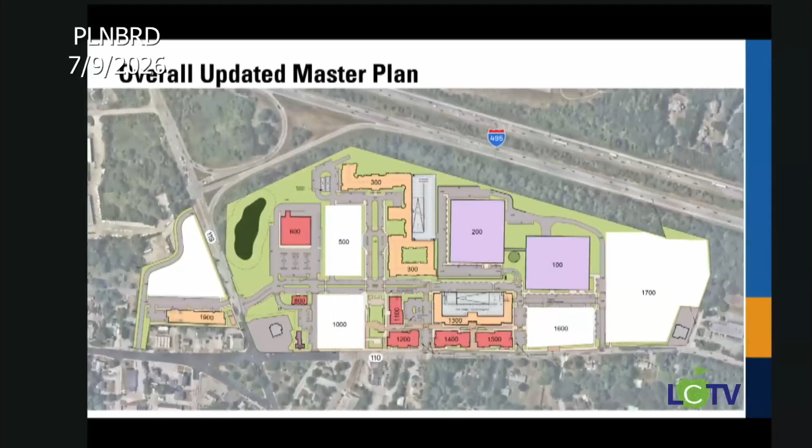Interlocked in an economic way. This anchor tenant is vital and really a cornerstone to attracting and accelerating our retail effort within the village, which has been partially approved by the board already. I can speak to that, and Mary can as well, but as we speak to tenants and capital partners, having an anchor tenant like that is critical to signing new leases and bringing more people on board. Equally important is that we wanted to be before the board as quickly as possible, especially in relation to the affordable senior housing.

If we could have waited until fall and submitted all at once, including this 1000 parcel, but all of these pieces—1000, this bank we're going to talk about, as well as this anchor tenant—all function as a catalyst for the retail, but also for generating revenue and income, showing the economic viability of this project to help justify to our financial partners the tremendous investment that we're attempting here with the nonprofit senior housing partner at 1900. So I may have mumbled through that, but really this whole section unlocks what's going on over at 410.

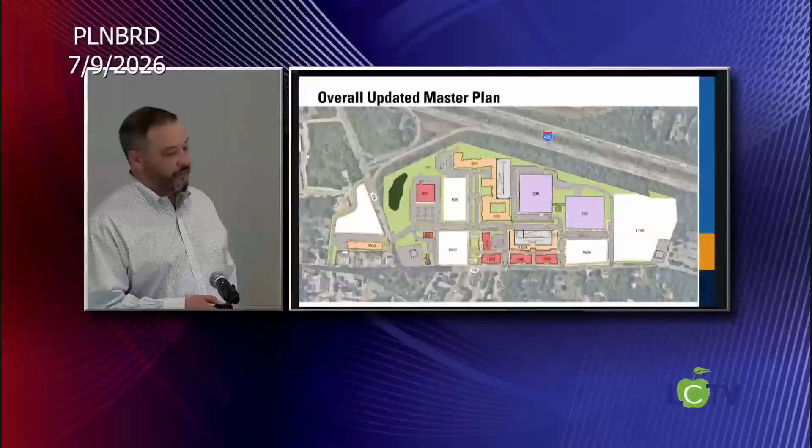I wanted a good visual, and that's why I demanded my laser pointer. Hopefully that's clear to the board, but that's something we wanted to emphasize. Happy to talk about that more.

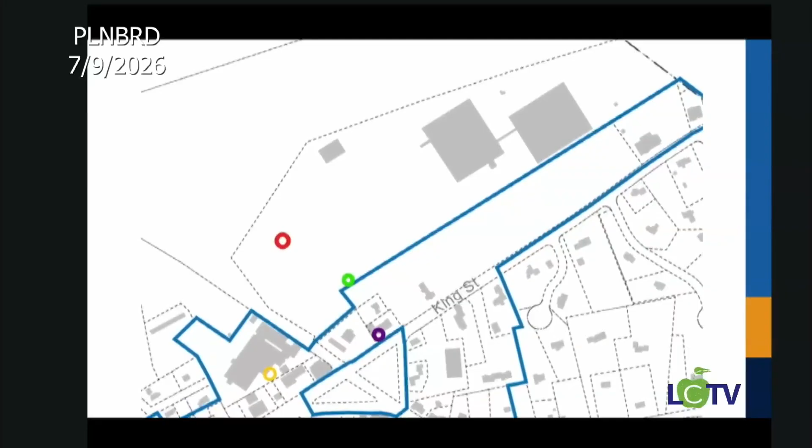This is a map you've seen before. I wanted to illustrate how we've been thinking about the elements being presented this evening. I didn't have time to label these, but this is the anchor tenant back here. There's King Street, this is the Tuttle House, this is the bank, and this is the affordable senior housing over here. This shows the location as it relates to the form-based code, within that blue outline area.

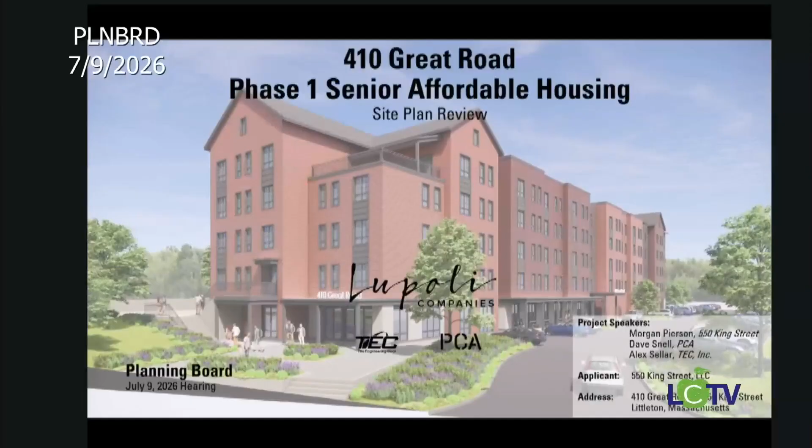So, as the agenda says, we'll start at 410 Great Road. This is something we're very excited about. We've been working on it really, really hard. It is a complicated, lengthy, and very difficult process, and we're happy we've gotten to this point, but of course there's a long way to go.

It really stems from, and it's worth mentioning this evening, dating back to the beginning of this project, before my time but not before others here, where it was clear to the community, to the board, to the select board, and to others within Littleton, the importance of bringing senior housing to this town—not only senior housing, but affordable senior housing. As I've been more involved recently, it's become clear in interactions with the board and the community that there was a strong desire to fast track, or front load, or bring on the affordable housing sooner than outlined in the town's bylaws.

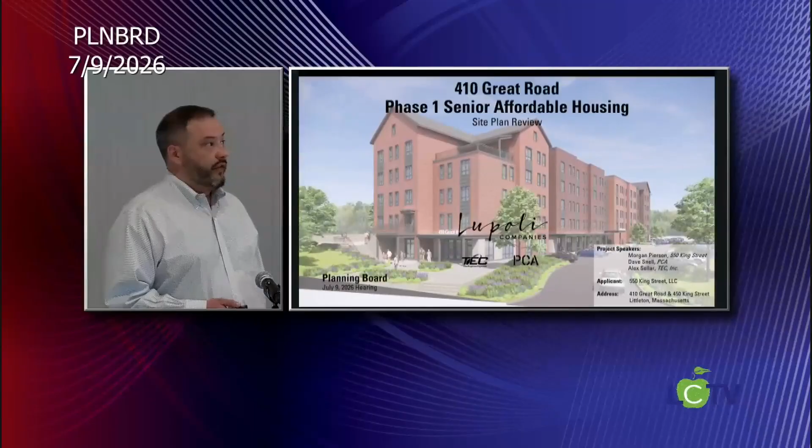I think we've made a very good faith effort to be responsive to that request from this board and this community. Even having received a letter from the zoning enforcement officer saying we are within our rights to follow the path within the bylaws, we've pivoted pretty strongly and put a lot of resources within our network and at the state level to find a really, really strong affordable senior housing partner.

Some of you have spoken to them. That's a really exciting partnership, I think, not only for the Holy Family, but for the town as well. We've heard that from this board, and we appreciate that feedback, because we're excited as well.

I'd like to also just provide a refresher. This was, and I won't go into the history of us acquiring the site, although I'm happy to if anyone needs a reminder, but really this was approved back in 2022 for 285 units.

At the time, that was achieved through a six-story building with a 4-story element along Great Road, shown here from the approval. It has the 10% affordable and the required parking spaces. Just a reminder, it was there.

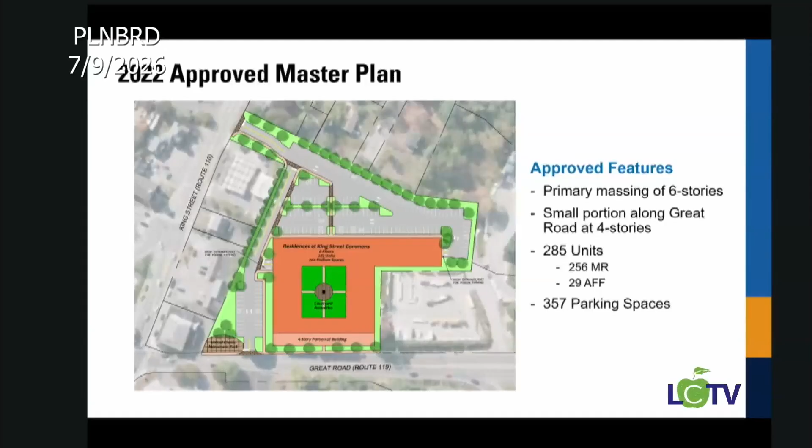I would also point out that we've been faithful to locating some open space, and we'll speak on this later, in honoring the United Elastics company that was at the mill many years ago. Here's the updated master plan, illustrating what we're talking about.

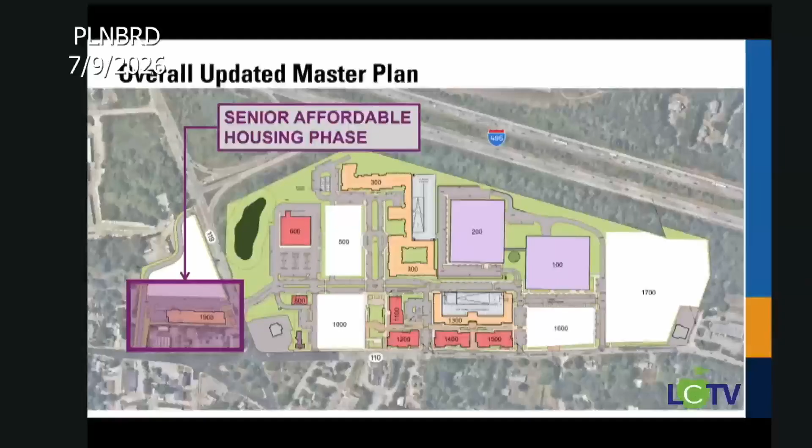Under the heading of a lot of work to get to where we are, we've bifurcated the site, and we've introduced this new concept here where we can fast track the affordable component, a big portion of the affordable component of the project.

So I'll have Dave come up. His team has been working side by side with our affordable senior housing partner to design this building.

Good evening, ladies and gentlemen, board. It's nice to be back with you. I had a nice little break from some of these, but good to be back in Littleton for this.

We're, as Morgan mentioned, really excited about this building and really finding a way to bring this critical use to the project.

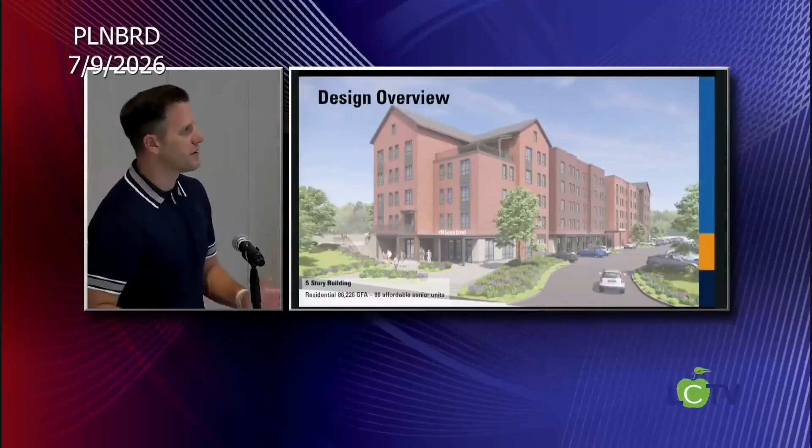So to give you a little bit of context for this building, Morgan mentioned bifurcating the site, and that preserves the ability to bring more housing in the future.

And we have, and I think you all know, as you drive up Great Road, there's a ton of grade change on this site. It's an extremely complex site. And so the way in which we've situated this building works within that grade.

It expresses itself along the ground here in the foreground, and the grade continues to raise up, and it kind of buries itself into the hill for the first story.

But maybe more broadly speaking, just about the building as a whole, we have a 5-story building. Portion of it here in the corner is 4 stories. And we have worked within the spirit of the form-based code here in many different facets of the design.

I think what you see here in the facades, a lot of movement in and out. You see different roof lines. You see a materials palette and design elements that are all born of New England traditional architectural design language.

Not only are they pulling from those references and many of the forms we see in the form-based code, but they're also pulling from the history of this site.

Old photos that we've seen of the building, the palette, the reddish hues that we're using here is pulling from the brick on the historic building, the charcoal colors pull from some old photographs we saw of it in earlier years. The divided light windows that we've brought in are referencing the windows up in the peaks of the roof. So we tried to pay homage to the history of this site by being inspired by it, and bring some of that character through.

So the ground floor of this building, and I'll probably pop back to the rendering in a moment, but the ground floor is the large communal gathering spaces for the residents of this building. So 86 units in here, and when we do projects like this, how you create this area of community is really critical. This kind of space has multifunction rooms, it has fitness uses, it has a hair salon, it has a small residence market, it has offices. A lot of these things are tried and true to creating residence communities and building relationships among the people who live here.

So the entire first floor is dedicated to that, and it has a small amount back here of covered parking as we kind of extend the building out. That's where our accessible spaces are, so our residents are protected getting out of those spaces, and they have plenty of room to move in and out through a secondary lobby here. The primary vestibule entry is here at the center.

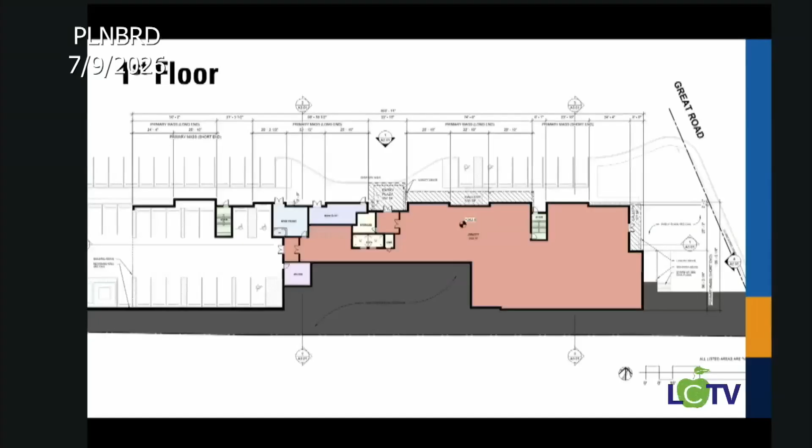At the second floor, we've included - and this is a typical residential floor - however, at the second floor, we've integrated exits on either end to allow for a walking loop. This is something that we try and do in a lot of our senior projects. The folks who live in these buildings love to walk with one another and to have a nice way to do that inside, do that outside, connecting through. So we've integrated that here, and that can provide connectivity off the site as well. Taking advantage of that grade change that I mentioned before, this is a really nice amenity for the residents.

Other thing to note, we have laundry on every floor. Those laundry rooms become, again, other points of gathering and socialization. And we've centralized the core here, which minimizes the walking distance required for all of the residents. So these are subtle design moves, but they're important to consider in making this a building that's extremely functional and welcoming for the seniors who will inhabit it.

And when you come back to how the building sits on the site, we feel like we are shorter than the approved height - we are one story less than what Morgan mentioned. We still integrate a step down, and by really pulling in some of these setbacks and the movement along the facade, the subtle changes in the materials, we think we're bringing forth a lot of the spirit of the form-based code. How it would relate to a building of this scale on this site, and how this park fronts on the street, we think is a really nice thing. As you're coming up the street, it's going to be really welcoming.

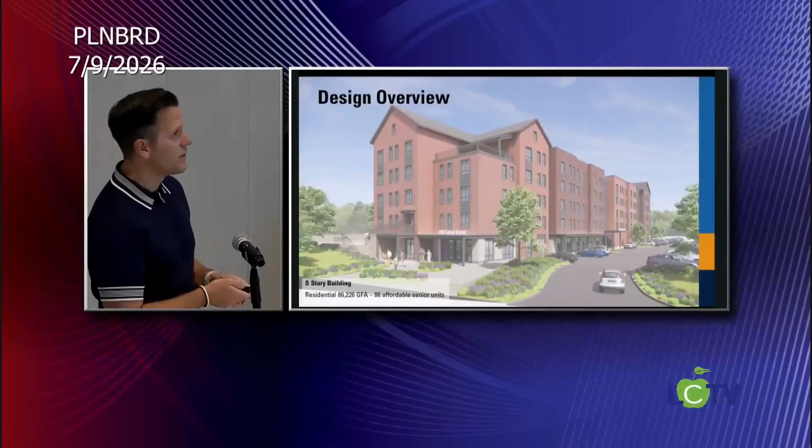And that's at the top right of the screen here of the building. Just to highlight a couple other features of the parking area, we try to keep it relatively simple and efficient layout for this use, and we have a loading pull off in the front entry area, so you can see about in the center of that main drive aisle. Use the laser, right? Fire the laser.

And so here's the pull off right here, and then along - so we have also two access points, one along Great Road, about across the street from the entry at 550, at the 550 King Street development, and then again accessing King Street at the bottom left of the screen here. So we try to maximize perpendicular parking and wide drive aisles, and even have, as Dave mentioned previously, this area that houses about 14, 15 covered spots, including some additional accessible parking.

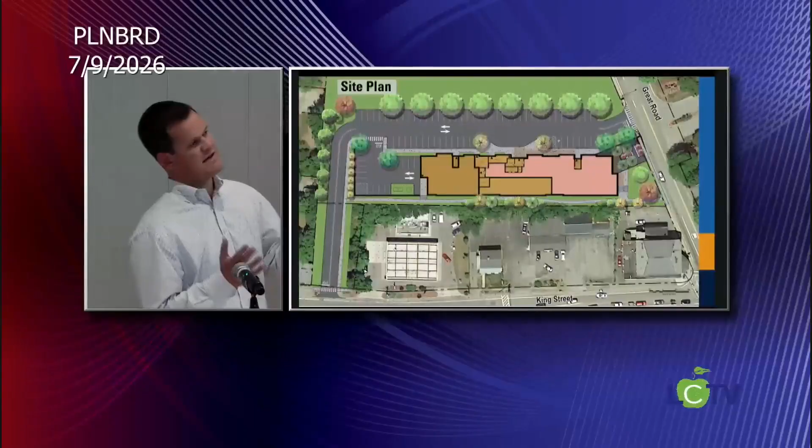Also a fun feature of this park is that it's angled and sized to the degree of that building at that location, so that shape is actually sized to that building - it's like a shadow of the old building being replicated on the ground. We thought that was a fun and creative way to pay homage to the historical use here.

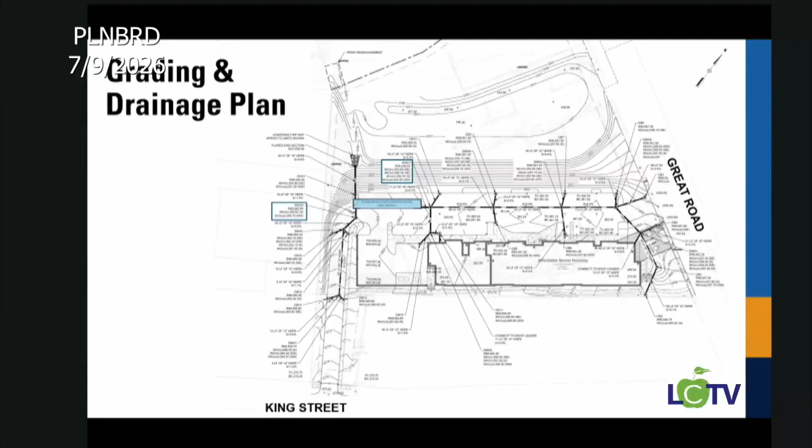This is another site view. You can see in blue, I know it's kind of technical, sorry, but I wanted to highlight that we are in the Aquifer Protection District. We are upgrading this site to current stormwater code as required, but it shows the emphasis of the infrastructure we're installing and investing in to get our groundwater recharge, which is incredibly important in this district.

Skip one here. Again, another technical plan, but we tried to put some color to this. Here's the utility connections that we intend for the site.

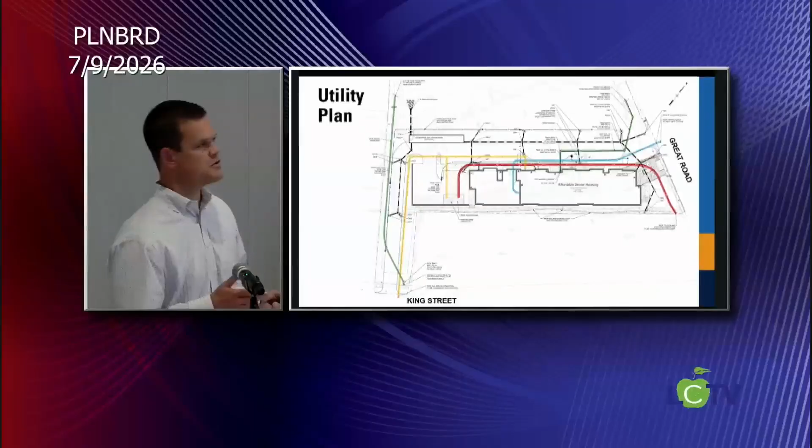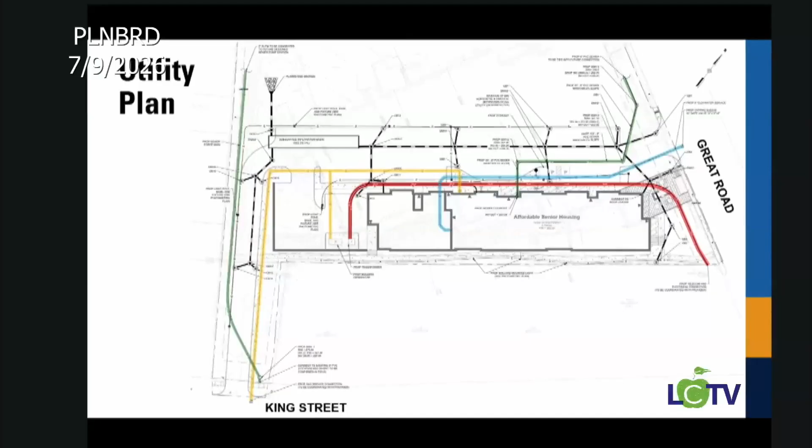A little challenging to see on this projector, but the intent here for sewer is to come out of the center point of the building and go down Great Road, headed to 495 at the top of the screen, and connect to a municipal or private line. We're still working with LELWD on a municipal pump station that could potentially be at that location, and then come up on the left-hand side to connect there to a force main connection to the main along King Street. And also on King Street, we'll be pulling gas and getting water and electric through Great Road.

At that point, I'll hand it back to Morgan to field some questions. Yeah, we're excited to hear from the board. Happy to hear from the board.

Before we open it up to the community as well, I wanted to express some sincere gratitude to people who have helped us get to this point, because this has happened relatively quickly, despite months and months of effort. Marion here is from the Affordable Housing Trust. She and Margaret were able to join us on a tour of one of the facilities of this affordable senior housing partner we're working with, and I can't overstate how meaningful it was for them to have members and leaders of the community drive to Brookline to tour their property, understand what their organization was about, ask really intelligent questions, and continue to engage with this group.

We are moving very quickly for them, but only because of the response from this board and from this community, and I think we'll continue to be blown away by how quickly we've gotten to this point. A lot of credit goes to some of the people I just mentioned, so I think it's important to say that.

The other thing I meant to mention is, as we look at this project, not only in the context of Littleton, which I think is very large and meaningful in terms of creating and delivering ground-up affordable senior housing, but even for the state of Massachusetts, this will be one of the largest standalone projects of its kind, especially regarding the deeply affordable element. I'm not patting myself or our team on the back, but this partnership is sort of a three-legged stool - this board and the community, the Lipoli family, and our affordable housing partner. It's really something, and I don't want to jinx us because we have a long way to go, but I think it's worth taking a moment to appreciate that. So with that, we'd love to hear from the board and anyone else who'd like to speak on this.

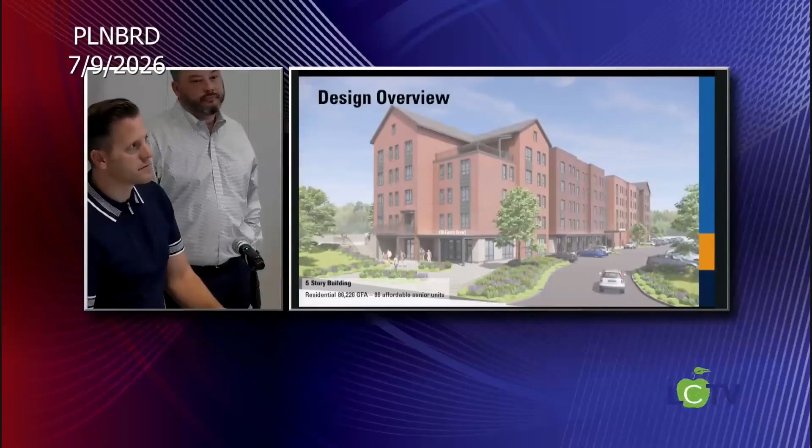I'm curious, and this is kind of like what Bartlett said, wanting to see the Great Road elevation and the King Street elevation to see what those gables look like. What's happening in that middle section? Is that a flat roof there?

Yeah, in order to make this work, there's a lot of equipment that ends up on the roof, so we needed some components of flat roof. We played with whether or not we wanted any peaked roofs in the middle, but then they'd all have to be really fake, so that we had enough room to put the equipment behind them.

Honestly, the elevation of the building started to feel a little busier. So we capped the two ends with gables as the approach, and kept it a little simpler in the middle with the flat roofs and variety of heights. So even at the entry, the parapet height drops down, and again, those masses.

This is just worth noting, but there are reveals here, here and here, where the roof line actually drops too. So you'll see this is a lower roof elevation here than this portion. We're putting in variety, and I think what you'll see is they'll read as much as actual forms instead of just popping in and out. They're also going up and down.

That's great. One question, I pulled up my notes from last time. You had said that parking had expanded from 46 to 102 spaces, and there were 84 units. Now there's 86 units. So has parking increased as well, or?

While we're on that subject, because it was one of my questions, what does HSL say about parking count? What are they finding? They have said 0.75 really is where they aim, maybe a little higher for staff, but really, we are overparked for their use already without getting to 1.25. In fairness, we're in a more suburban location, so.

I think it has more to do with how many of them just drive, period. Yeah, it's the residents, that's and where.

And relating to that, the handicap space number seems low for an elderly unit then? It's what we typically do with them, following Massachusetts requirements. I know it's Massachusetts requirements, but that's just a comment, and I think you'll see a lot more, again, when you get to this, is why we have a very big drop-off area in the front, because I do think a lot of their residents use transportation services like that. I was surprised at how few handicap spots were at many of the facilities I visited when I was looking at facilities. I have no experience with that.

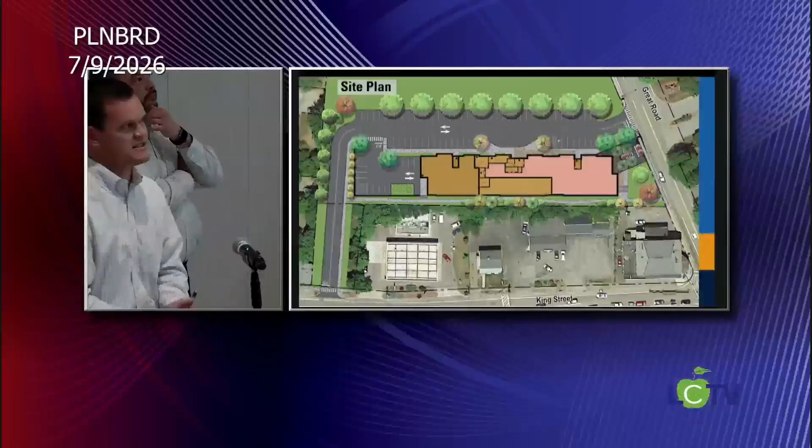So, are you done? While you have this one up, the other site plan you have shows the white part there, the road going from 495 all the way down through there. Is that not going to be discontinued?

Probably, Daryl, you always catch me when we try to catch up with master plans. Yeah, sorry. Are you talking about this right here? Yep, that is a current placeholder.

It does make sense because there's an entry here, and we have also talked about a pump station and maybe potentially an easement to connect to the sewer up at King Street. So the concern I have is that, particularly that one there, if it stays, some people might try to use it as a shortcut to avoid the light up at King Street.

And then the same thing would apply even on your smaller one there, you have a cut through that you might want to address so it's not amenable to being used as a cut through. You're talking about like right here? Yep, or the one all the way from the top. So I think you should pay some attention to driving habits, people trying to use that as a cut through.

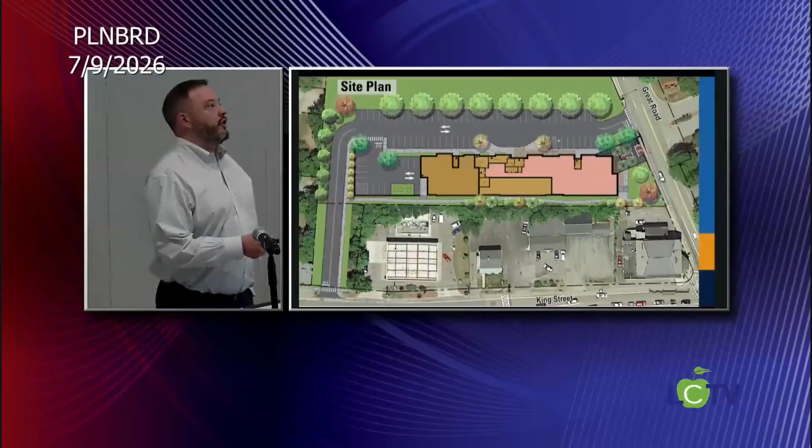But just to finish that, right there, that prevents the cut through. That's a pretty silly cut through to come through here, then you're out in the intersection again anyway. No, if you come off of 495 - I'm saying you're coming here. Yeah, and you cut through like that. Fine, that's it, and then you avoid the light at the top of the hill. I would do that.

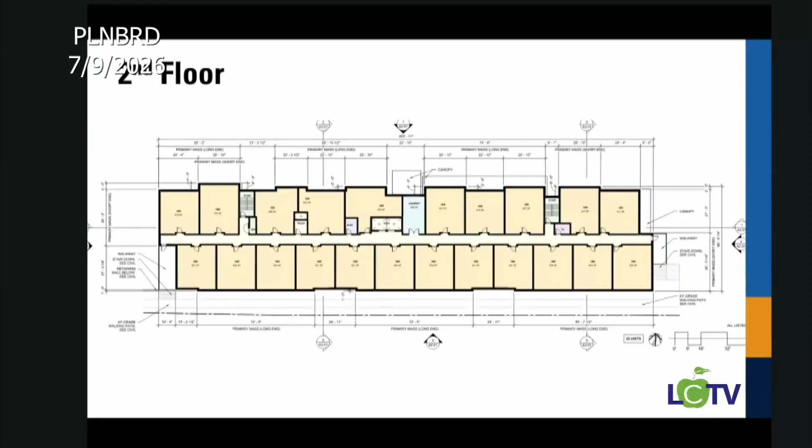We're gonna have gutters. But I mean, I have two valleys that come together. In snow and rain, that's gonna just dump right onto your porch there. I can tell you from retail phase one that we've been progressing, getting more detailed into how the gutters and downspouts and whether we have snow guards, so that's a higher level of detail, but we are considering it. Yeah, I just don't think your downspouts are gonna cover it. Anyway, that's what you gotta worry about, but you might wanna really look at that.

And I presume these will be like split systems, or is this? We might actually get a central system. We're investigating all of that. Well, if it's a central system, they can be really large.

Yeah, and to your point, the sight lines we're talking about and the height of those parapets, I think that's gonna screen it. To Bartlett's point, I agree. I'd like to see what it looks like from King Street. The extent of it, I just wanna see what you're thinking about. And when we say from King Street, we're gonna be seeing it behind the existing buildings on King Street. Yeah, we didn't do that because then we'd have to model all those, but we can. Just saying, we'd like to, I think it's worth it.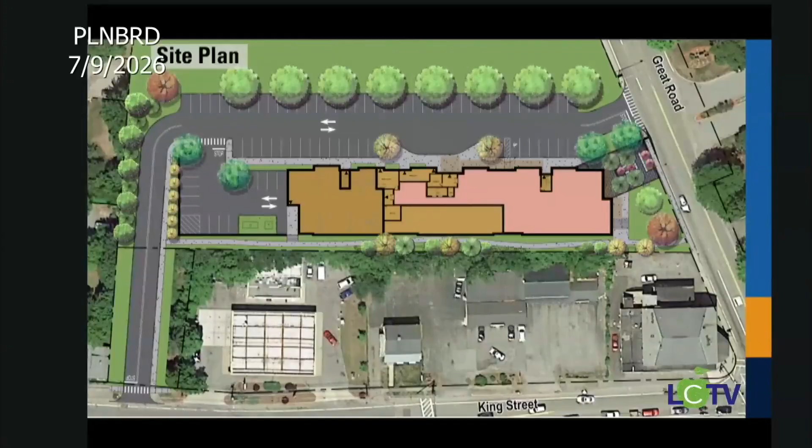And then I just had a question for Morgan. What's the sewer situation? We have been in active conversations with LELWD, with Nick Lawler, and we've all acknowledged that we need to make a formal request to transfer capacity over for this phase from 550. That involves likely a pump station here that could be covered through some of our MassWorks grants that we've been working on. We actually had it in a previous submission, but have pushed that to later this year, next year. And then hooking in on King Street right here.

Okay. So next, who here would like to have comments? Mark.

Mark Grambacher, 205 Hartwell. First, thank you for bringing the affordable housing. I think this is all great. Most of my comments are a little minor. Some of them are a little more.

I'm a little concerned about the entrance there being right across basically from your 550 entrance. You're going to have people that make a right turn and try an immediate left out of those two, that's going to be confusing. I don't know how these entrances jive with what the state report said, where they wanted you to come out basically at the 495 light.

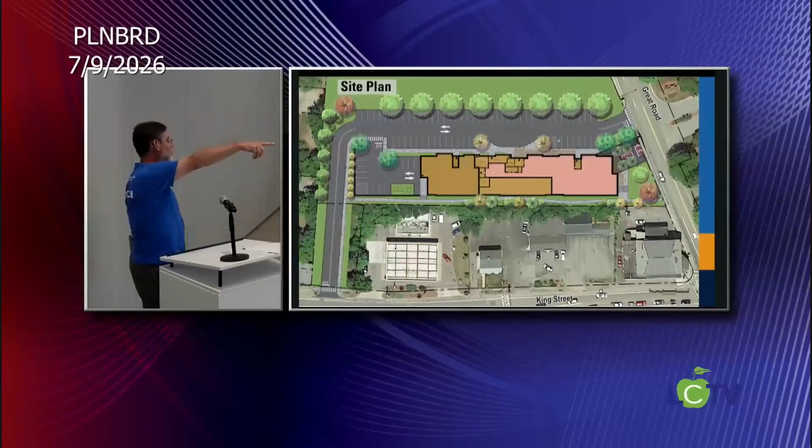That's one comment. Another is your path there for walking doesn't have - you have steps down to get down right by this, right at the end of the building. You need an ADA way to get down. I don't know if that sidewalk is an ADA grade, so you might have to check that.

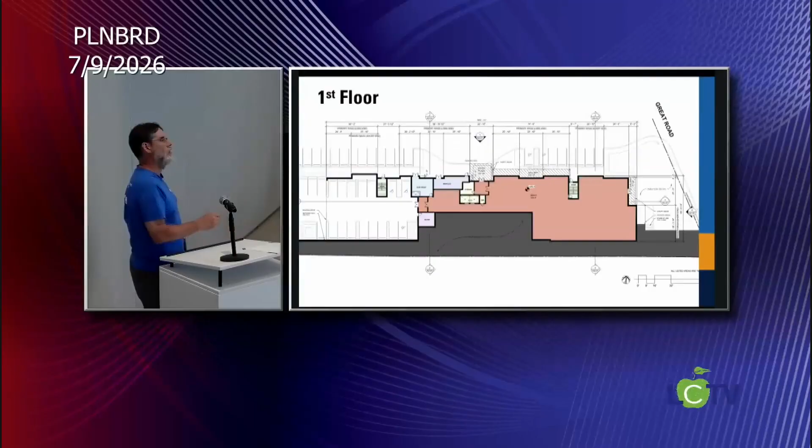If you go back to the building, your porch patio, whatever you want to call it, there on the 4th floor - I question whether you might want that on the back of the building rather than the front, because that's right over 495. I don't know how loud that will be up there versus if you made it on the other side.

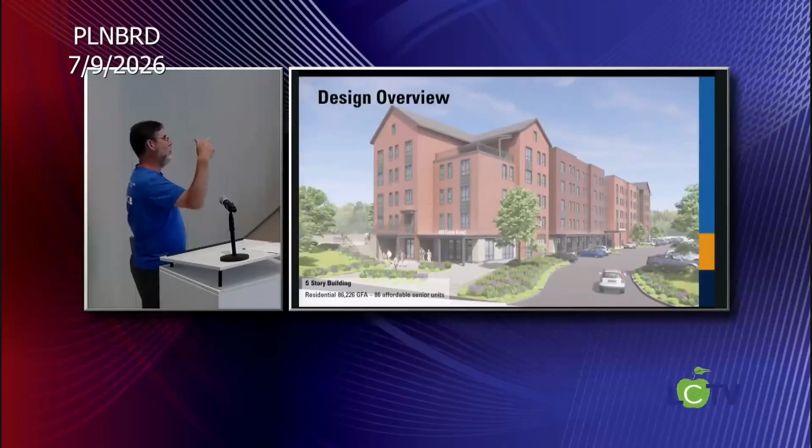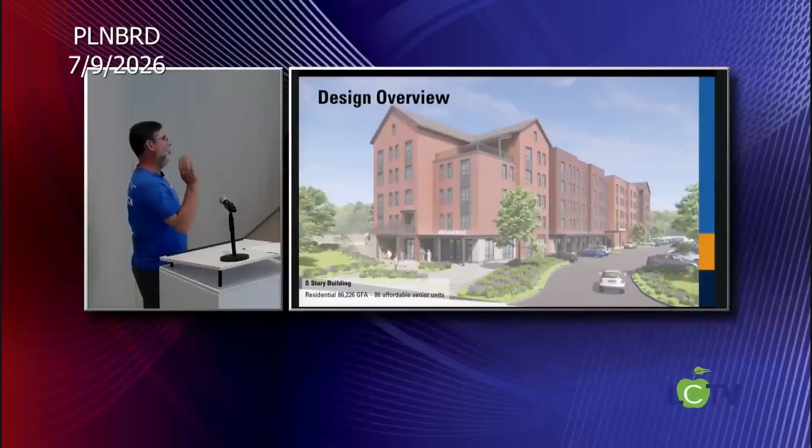It would also be helpful - the way you show this now behind the building, it looks wide open, like you can see for miles, but you can't. There's buildings right there. So it's kind of deceiving in this view. You're going to be really close packed. So just a view that shows where those buildings are on one of your renderings - I know you don't want to render it in detail, but relative heights and relative views would be helpful.

But my main, bigger concern is those two driveways are really close. You're going to have problems for entrance and exit.

George. George, you should take Morgan's seat at the next meeting so that we can compress the time.

George Sanders, 672 Great Road. I'm going to take a little bit of a different approach here. I talked to Sal and he was planning on being here. He told me it's for this anniversary lunch - this is his 32nd anniversary, so he took his bride to wherever they met, wherever he proposed. That's where he's at. Actually, he took time to call me this afternoon.

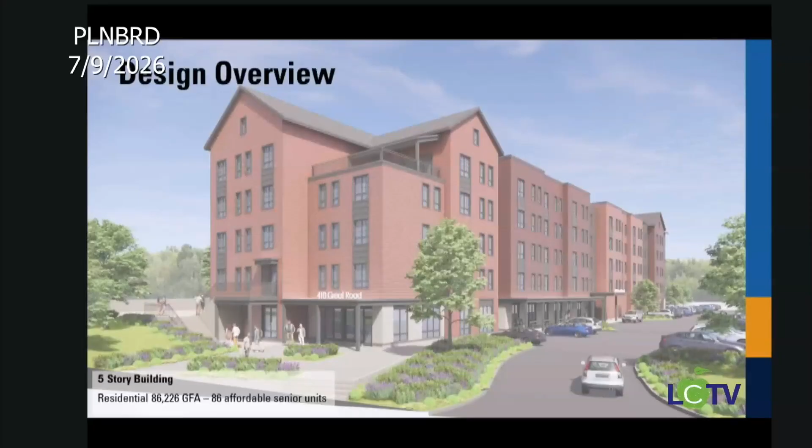If we can look at the design overview for one second. A lot of us in this room have had the chance to look at different senior housing facilities for family members, and I was really happy to see in this view all of the windows, especially in the gallery area. I think when you're looking at places, first impressions matter, and having a lot of natural lighting is really important, so I was really happy to see that. I think the building looks great, and we're super excited to move forward.

Thank you. I would like to address these comments on behalf of the board, and I think our board is completely aligned with moving this forward as fast as we can. But the actual movement isn't in our purview. We want to do whatever we can to support it.

For that matter, we have opened a hearing for the site plan and stormwater review. We do site plan review also, because this is in form-based code, it reflects that. We've had comments, I think we've all commented on the building. In general, what we've commented on tonight are details and quibbles, and the general outcome is really heartening. If it can get going, that's great.

Maren, what is the status of peer review? So we do have the cost estimates that came in today, just forwarded those. Green is able to start the review under an old contract because they have a few hours left on a prior review, so we'll get that started while we're doing the paperwork, contracting, and all that. That will get underway right away.

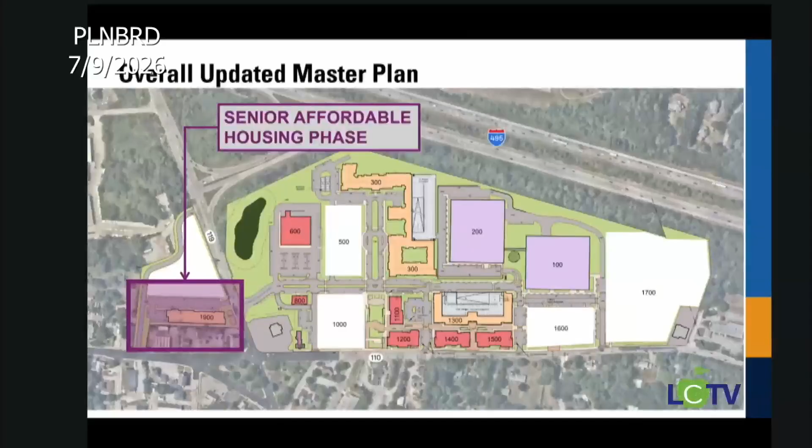So this being said, we are going to continue this public hearing to August 6th. What time do we want to do it? 7:15 again, or what are we doing beforehand? That's what we had, 7:15.

Can I have a motion to make a motion to continue the public hearing on 410 Great Road to August 6th at 7:15? Second? Thank you. All in favor? Aye. Okay, thank you.

Now, I was going to just add one — I looked at the waivers in their submission, and I didn't see any showstoppers in their waiver request either, I just want to signal that. I appreciate the waiver narrative. We sort of assume with a building like this that it's not going to be a little villagey thing, but I think the board appreciates the fact that you went to the effort to, you know, not justify, but to explain.

And I was just being bold to say, I didn't see showstoppers in the waivers. That took effort too. If we had any showstoppers, I think I would have tried to bring them up tonight. Yeah, that's great.

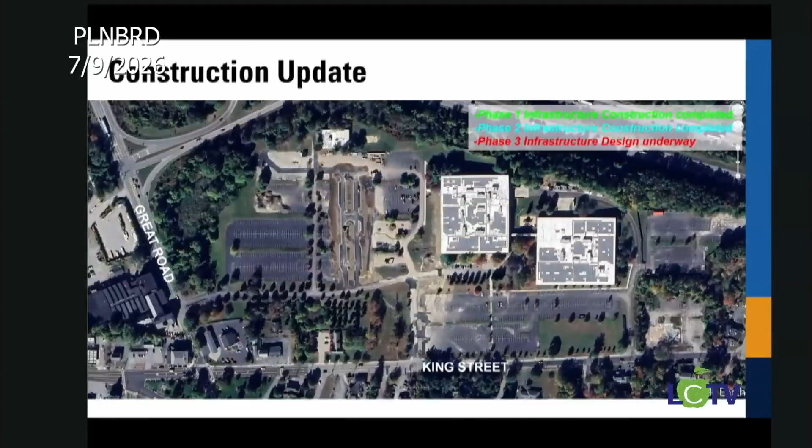We're going to start with the retail phase 2 north development. But before that, I want to give an update on the infrastructure projects that have been going on for the last couple of years, allowing us to be here tonight to present these projects. Currently we have 3 phases of infrastructure ongoing: phase 1 infrastructure shown here in green, and phase 2 infrastructure project shown in cyan leading towards Great Road. Just recently, over the last month or so, those projects have been completed, installing crucial infrastructure to support the developments we've presented to you. These have been awesome projects we've worked on in collaboration with the town and the state.

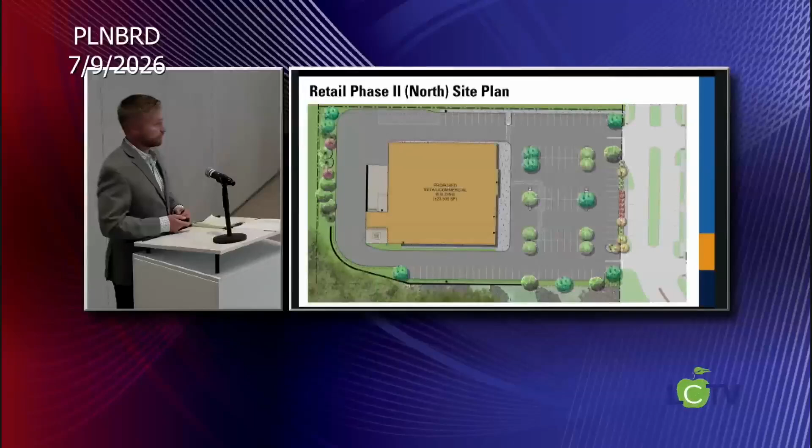So diving into some of the technical aspects of this. This site is existing today. It's a big parking lot, a big paved parking lot. I'm sure you guys have been out there.

The grading actually slopes from plan north down to plan south. So to counteract this and create a nice level pad to build a building here, we're proposing a retaining wall along this boundary, highlighted in green. That's going to allow us to pick up some of that grade, flatten out the site, and make a much more comfortable retail pad here.

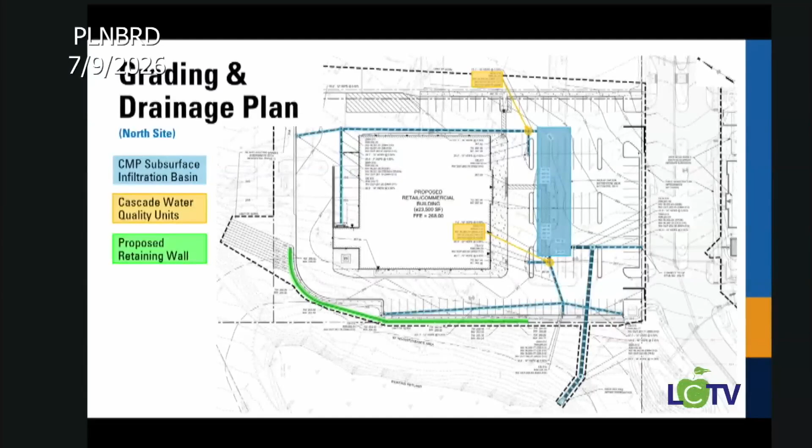Along with that, we're proposing a severely upgraded stormwater treatment system, highlighted in blue. That's comprised of deep sump catch basins to pre-treat stormwater runoff. Those are directed into these yellow areas, some water quality units for further treatment, before being directed into a subsurface stormwater system below the parking area to allow that stormwater to infiltrate, with any additional stormwater directed down through this pipe and out. The pipe here is an existing stormwater outlet that we're looking to tie into, with much cleaner stormwater after being treated and flows reduced.

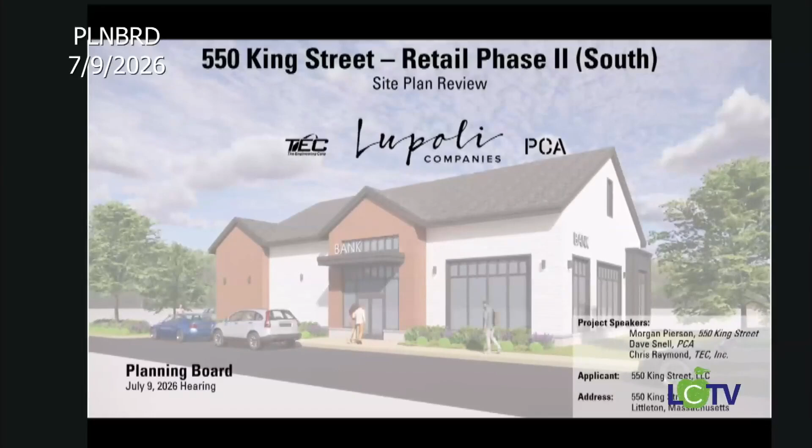We're excited to present this portion of the development because it finally answers the question we've received so many times: what are you guys going to do with the Tuttle House? We have an answer, and that answer comes from a lot of feedback we've gained from multiple members of this board and the community.

So we're looking to situate the Tuttle House in this corner here, and once we do that, we're left with this weird, awkward L-shaped lot. We did multiple iterations of what to do with the remainder of this site. There wasn't a whole lot of room for a substantial building here, but what fit nicely was a bank. So we're proposing a bank at the northern portion of the southern portion of this site, situated along the central boulevard.

The site will be accessed by 2 driveway locations along the boulevard, and 1 driveway location along King Street. This driveway location here will actually be consolidating 3 access points in the existing condition. If you were to go out there today, there are actually 3 access points right here, and we're looking to consolidate those down to 1.

The site entrance here we've designed similar to what we did in retail phase 1 — we've pulled the parking back into the site a little bit, allowing safe access for vehicles coming in and out of the site, as well as the ability for cars to adequately park without conflicts with incoming traffic. It also allows a great opportunity for us to enhance landscaping along the driveway and entrance to this site. The remainder of the site has been filled with as much parking as we could fit in, as well as pedestrian and landscaping improvements.

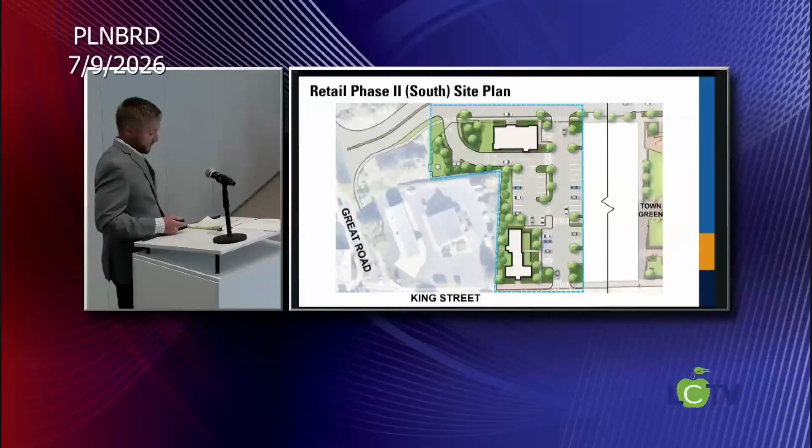So diving into the technical aspects of this site, similar to the north site, we're looking to install an updated stormwater system that includes deep sump catch basins directed into a water quality unit before hitting an infiltration basin and being outletted into the same system that was shown on retail phase 2 north.

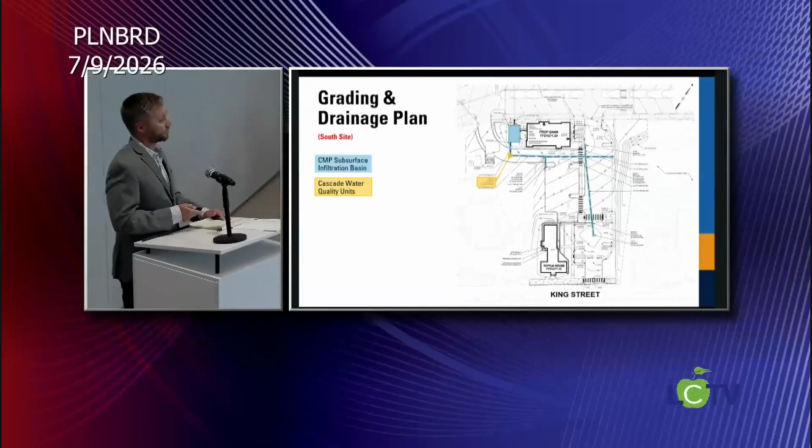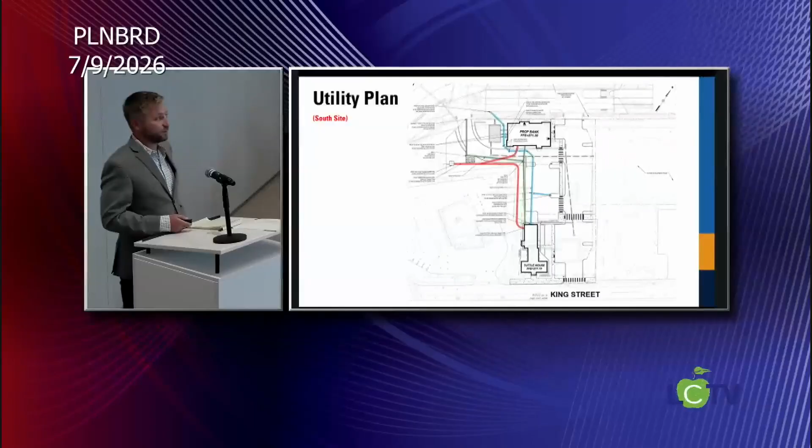And also similarly with the utilities, because of the utility infrastructure that we've been able to install as part of the phase 2 infrastructure project, we'll be tying these buildings into that infrastructure to the north of the site here. And we have been able to start some discussions with LELWD on how we support these two buildings.

So with that, I'm going to turn it over to Dave to talk about some architecture.

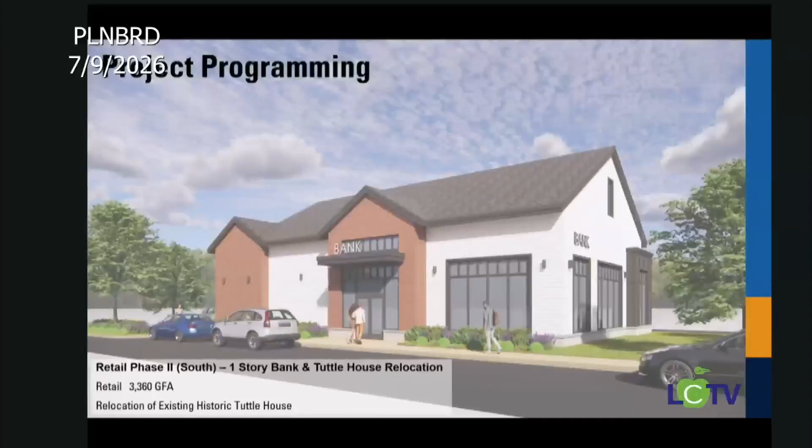So, here on this bank building, a sliver of this part of the parcel is in the form-based code area. So again, we're trying to pull from a lot of the tools that we've used in other parts of the site, working with the primary masses, offsets, and creating a palette that is not too many different colors.

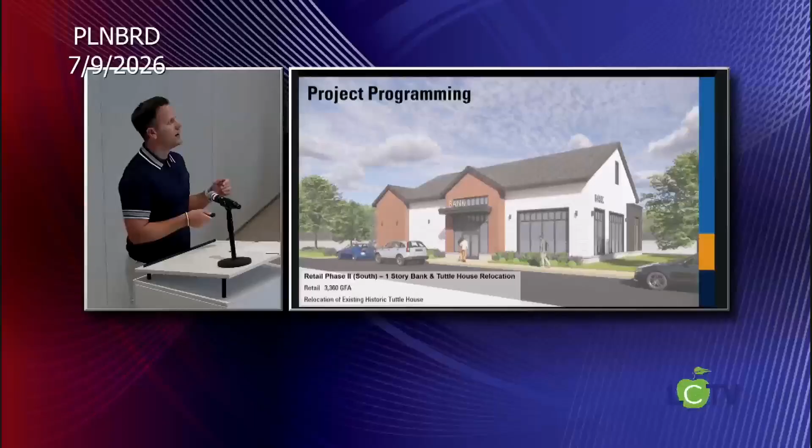One thing I want to just point out is that because of the location of the site for this bank, it is oriented towards Great Road and/or Entry Boulevard. So a lot of the articulation, the primary entries, all acknowledge that this new site entrance is really what it is fronting on. We've put a lot of articulation on the end of this, which faces Great Road, and the primary entrance here along the boulevard. So just wanted to flag that's how we're orienting it rather than orienting it towards King Street, which it's obviously very far removed from.

Other than that, very similar tactics used at other buildings in the retail village with traditional New England materials, the sloping roofs. This one has some brick on it, and we're still doing things like the projecting storefronts here, integrating some canopies at the main entrance, and trying to make this fit with the rest of the development.

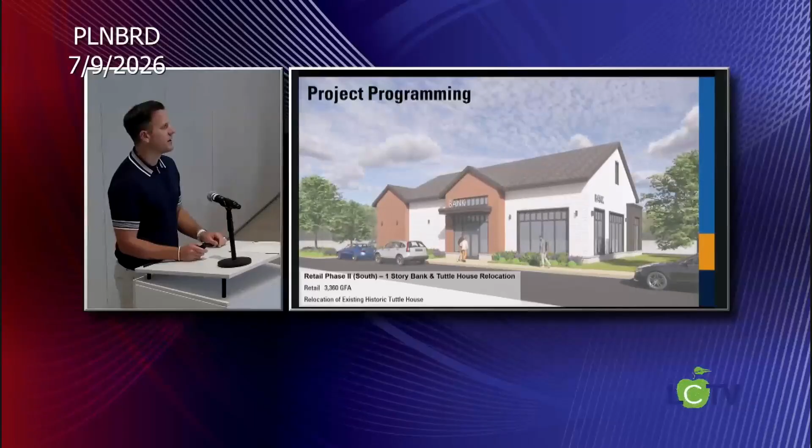The other thing I would say is that we are working very closely with some prototype plans from the bank that we're trying to lease this to, and so a lot of these moves, we're trying to blend between what they have for functional requirements about how this thing works, and where we need to enter. We've flipped and mirrored and rotated and mushed it around to get it to do as much of the things we can do for the form-based code, while also delivering on what the functional requirements have to be.

So I'll leave it at that. Just to note that we think we're still doing a lot of the same things that we're trying to do in the other buildings, and this one has some red on it.

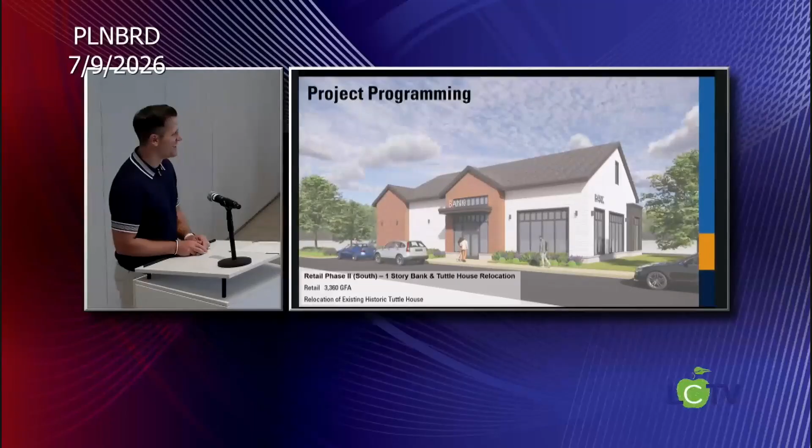We don't have a lot of good slides for this, but we did want to speak to the Tuttle house. Chris already touched on it, but I wanted to provide this as a visual for the board here, showing where it currently is and where we're looking to slide it to. It will look something like this, but this is of course just the current view as a reminder. Don't want to understate the importance of this move and being able to preserve this building.

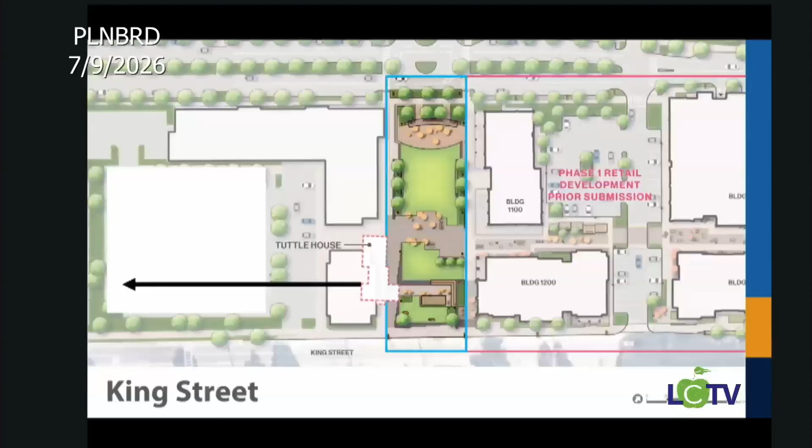Looking to hand it over for questions and comments, but I wanted to go back quickly, if I could, to this anchor tenant layout, because we met with the board last month and heard some feedback. As a team, we went back and looked at different configurations given that feedback from board members, and Chris spoke to some of this, but I wanted to reiterate it. We also reached out to the tenant that we're really courting for this site, and you've heard me say so many times the importance of having them as an anchor tenant. Chris talked about the flow, the delivery, the loading, the screening, the orientation towards the residential, and the public safety element.

When we approached them again asking, could you twist this, could you move it up, their initial immediate feedback was that their trucks really benefit from circling the building instead of cutting in front of it. If we had turned this the other way and had trucks cutting in front of the main entrance, it's just a public safety hazard. It's an operational negative for them and for their customer experience. They also mentioned that customers need to see an obvious place for where they're going to park, where they're going in, and how they're leaving. By tucking the parking behind the building, it creates confusion they've found in other locations when they've tried that. More importantly, our team really chewed on the feedback from the board.

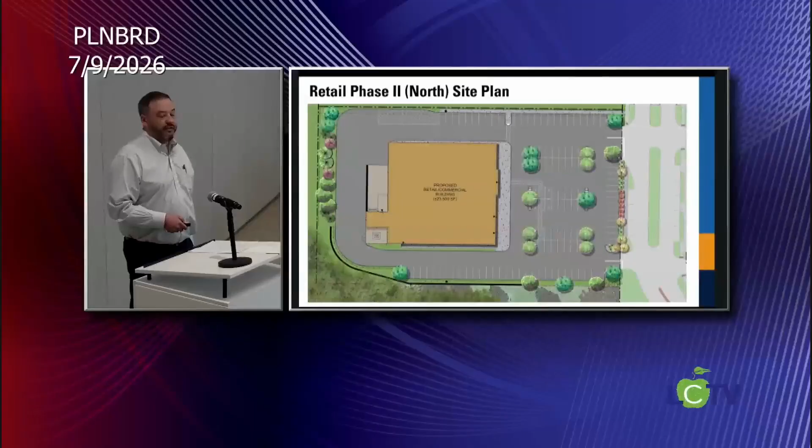I just wanted the board to feel like we heard you. We've really looked at what this could be in another way, but really it comes back to this being the best layout to have a tenant be successful here, but also all the other reasons - the safety, the connectivity to the rest of the campus. So that's why you see what you see today.

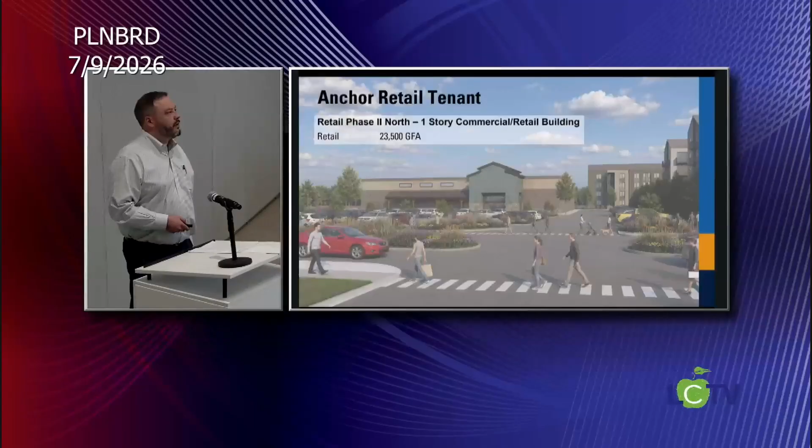Can you flip back to that rendering again? One of the people, that one. So I didn't notice it until it became prominent here - you show the crosswalks down the boulevard, but if you parked over in the parking there, what's your walk path across the boulevard?

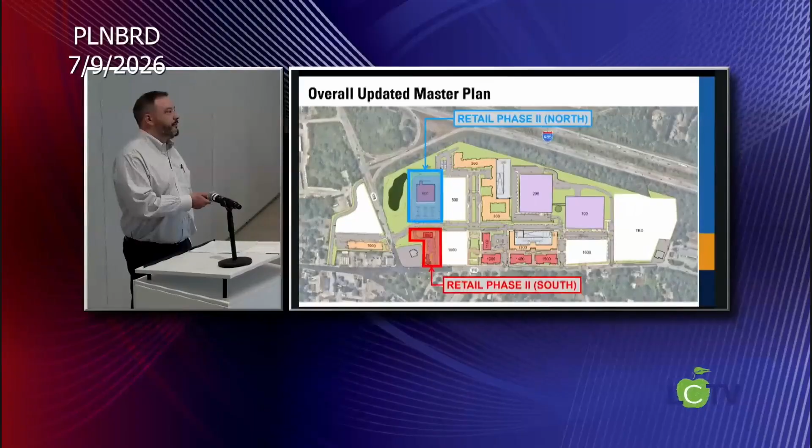It's right here. There's a planned prominent piece of sidewalk right here. So there would be a crosswalk there? Yeah, it's very prominent. Our renderings are very illustrative, Daryl, and I apologize that they're not all literal, but it's right here.

Okay, I just look around the corner. You had some kind of walk along the parking and along the property line. Yeah, I think this is the real function here, and then there's sidewalks that come across here. It's a crosswalk up there - you can see it right there. It's a little offset.

This is accurate. Okay, so let's - I appreciate your comments about, because we did give you feedback on this building, which didn't alter it very much, and I appreciate you acknowledging that you did work with our comments and ultimately it didn't work out. Whatever. So anyway, I'm going to go down the board again, Bartlett.

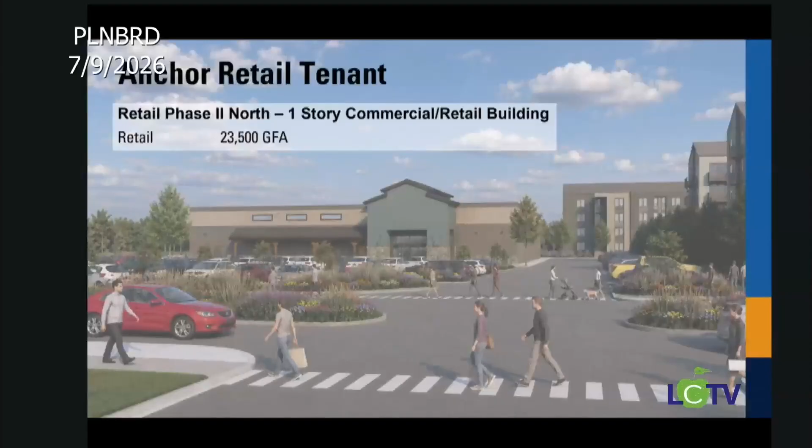I love that with the bank, you're like, hey, we need to bridge that a little bit. This is not so far outside of the form-based code, and I think bringing in elements that can speak to it minimally, without compromising the space on the inside - maybe you don't play with setbacks, but I think doing something, because this is another kind of front door to the development, and needs to feel more welcoming than that. Obviously there will be signage on it eventually, but I think giving it more of a face, both from this side as well as the side facing out to the street, would be great.

I think last time Daryl mentioned maybe you could incorporate a facade so we're not compromising on the interior needs for the tenant, but also making it more engaging for residents. That would be terrific, because we don't want to get in the way of the conversations you're having with tenants, but we are all accountable to residents and want to make sure we're meeting those needs as well - something that can bridge the aesthetics set by the form-based code and everything else going on would be really great.

Yeah, we agree, especially on this side it's important for us and the plan. One of the things we were talking about as a group is, do we commission a mural for that side? So to your point, we're not compromising the functionality of the building, but creating something more compelling or interesting there.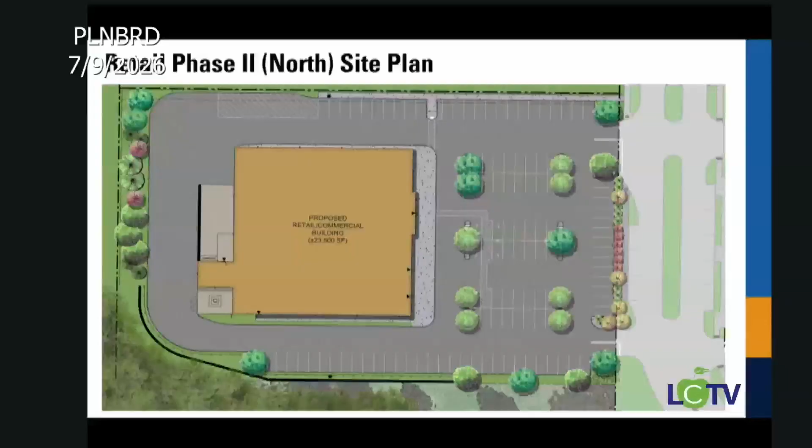I'm asking because, based on what we hear from residents, adding a bank there will make for 7 banks within a half-mile radius. What I would say is we have talked to every possible tenant, not necessarily for that space, but banks are unique in that they're okay standalone, whereas some other users want to be part of the heart of the village. It's a bit of a Goldilocks situation - they're okay with this if they like that drive-through. Banks have evolved to having these drive-throughs.

But you're not showing a drive-through on the site plan. There is.

It's fairly subtle, but I don't know if it's because of this projection. Oh, I see - it just doesn't have a canopy. It shows up better here, Jeff, if you look at that - you can see some arrows.

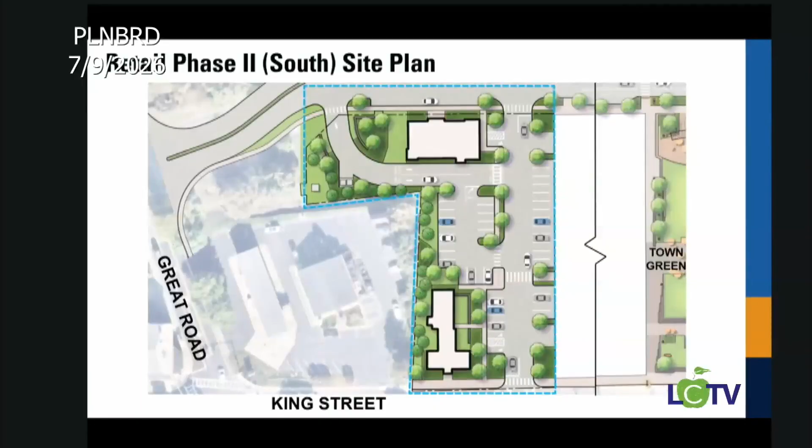And to go on to Morgan's point too, because of that awkward L shape, you can only fit so many different types of buildings in there, so it's more of a little jewel box. We also didn't want the front entrance of this site to be just a huge parking lot, something that was kind of small and quaint. The biggest piece is kind of the financial part that this supports too. It was a really good question, but that's how we backed into this ultimately.

While we have this slide up, I think you also need to consider the cut-through on this also from King Street to Great Road to avoid the light, which is only a problem during certain times of the afternoon. But I just think it needs some consideration - maybe speed bumps or traffic calming.

Or no left-hand turn up at the end. We have speed bumps in our Riverwalk campus as well, not necessarily for that reason, but we have that experience. Also, today we obviously see people cutting through as we speak, but when this is better configured and professionally managed, I have a little more confidence. We certainly hear that comment, and we need to give it some thought.

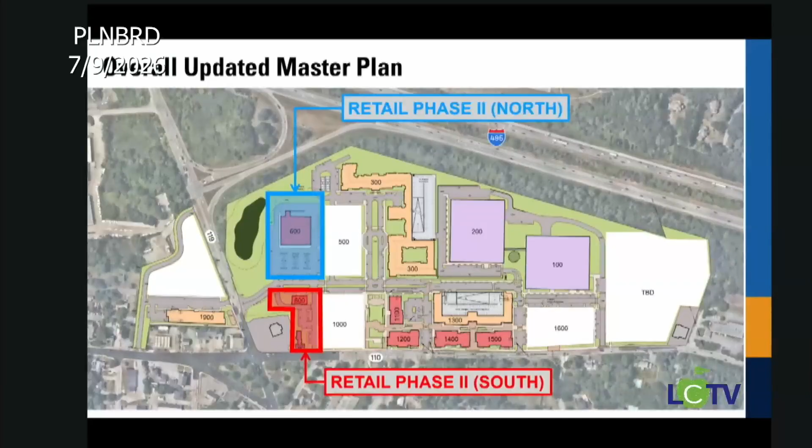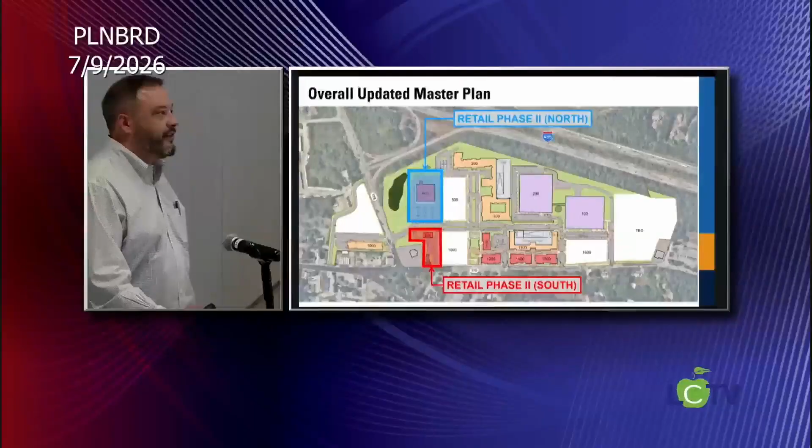Do you have a schedule for coming before us for that phase? Honestly, it's going to be as soon as possible. As soon as Dave finished with some of this, we got him going on the designs for those buildings, so my hope is within this summer — our intent is this summer. No summer for Dave, okay. Dave's already had his vacation, so next month.

I'm now going to ask the board to approve continuing this hearing — what would we continue it to? August 6th at 7. Do you want to do this before or after? I think we can just fully continue it since we won't have peer review back, which is what's pushing things out. We should allow time for back and forth. So what would be the time and date? If we do 7:40... it would be continued to the August 6th meeting at 7:40.

Can I have a motion? I make a motion to continue the public hearing for 550 King Street site plan special permit to August 6th at 7:40. Can I have a second? Second. All in favor? Aye.